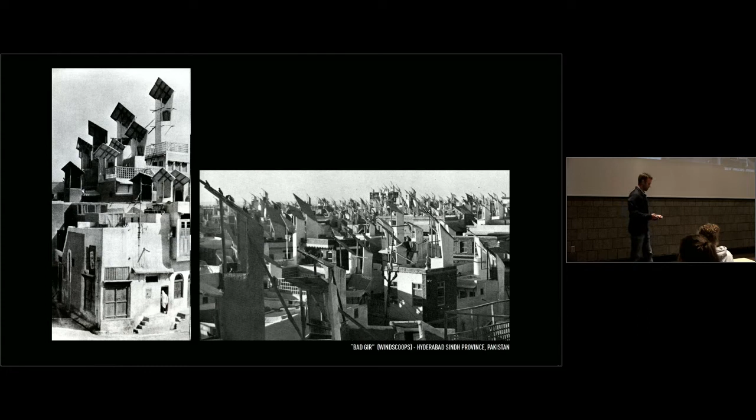So a modern version of architect - we can all have heroes. My latest hero, who I was talking to some of you about today, is Hiroshi Sambuichi, a Japanese architect doing incredibly responsive buildings.

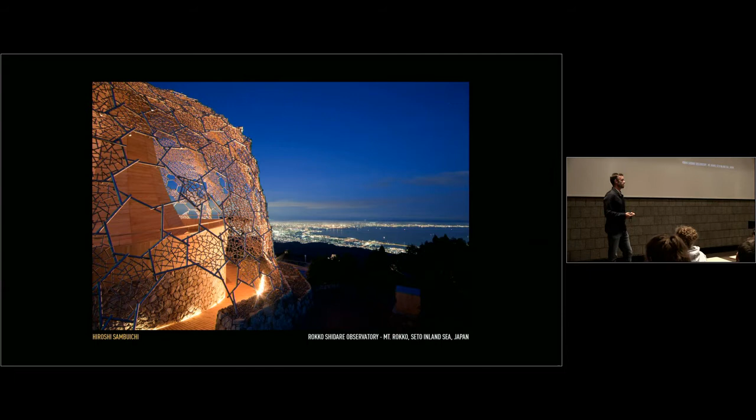This is an observatory at Mount Rokko. He works in the Seto Inland Sea, and this observatory's brief was to have an overview to understand the landscape and its connection to the city - that's Osaka in the background. What he does is spend two years, in two cycles, understanding the winds, the sun, the rain, before he ever designs anything. He understood here at Mount Rokko how the winds go.

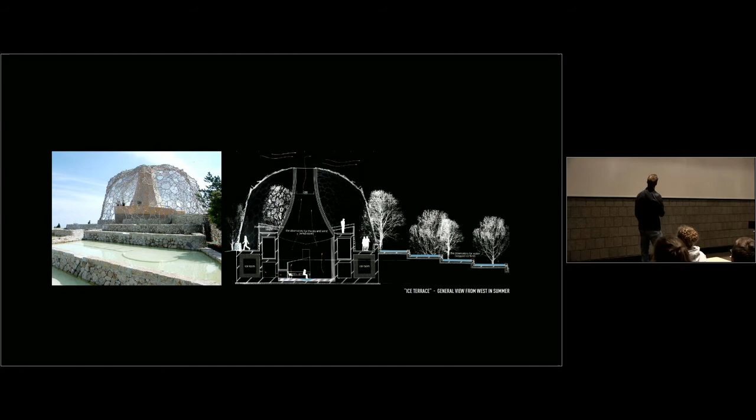Through this long observation, he designed a series of ice terraces - pools that cool the visitor in the summer, and then in the winter they harden and freeze. The actual frame around it is made from wood and stainless steel. Going through those two years, he realized there was a special frost that would occur on all the branches, but only a certain size branch, and only where the prevailing winds were. So he studied and found an exact diameter, and designed this frame around it to pick up this ice, this mist, and block the wind in the winter. Then when it starts to melt, it melts into these pools and then freezes.

From there, they cut out these chunks of ice and place them underneath the building in what he calls an ice shed underneath. But the magic of it is that when it starts to cool, it goes through these chambers and up and out through what's called a wind room. Well, I don't know if you can see - can you maybe dim the lights a little bit for these slides?

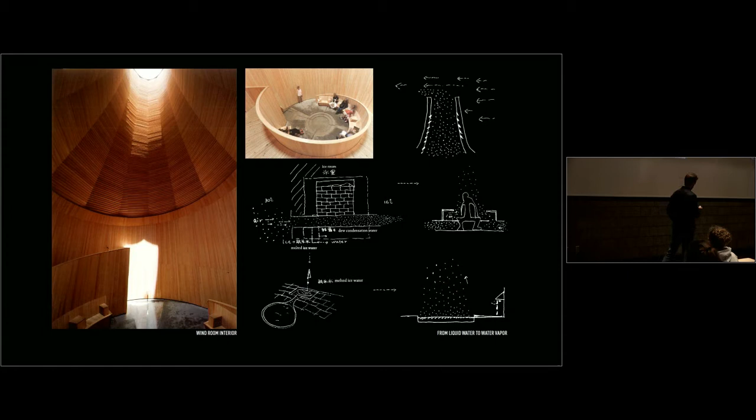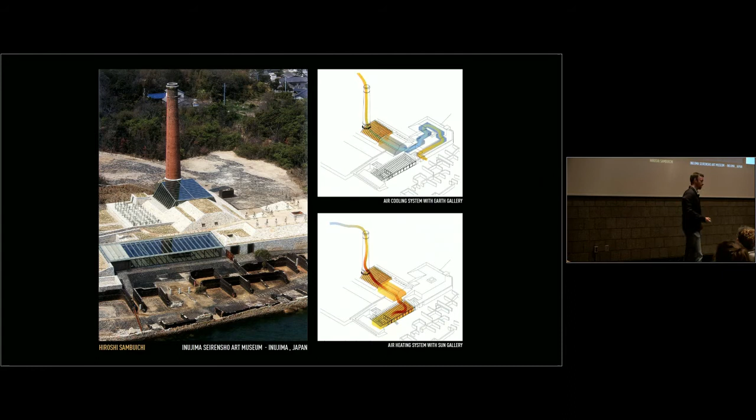What happens is there are vents on each side, and you sit. You can see this person with their arms up, and it ventilates your armpits. So that cool air comes in during the summer, and it's specific to place. I just wanted to show some of his other stuff, not so much talk about it. But if you ever have a chance to visit Japan, you have to see this. He doesn't have a website, but he has two monographs.

The last one before I start talking about my work with Lake Flato is Glenn Murcutt. Glenn had a big impact on me. I started to understand principles of architecture that were responsive. I started understanding the land because of him, and this is a very early one of his works—you may all know it, the Magney House. The Magney House was designed around a principle, and this is off the grid completely.

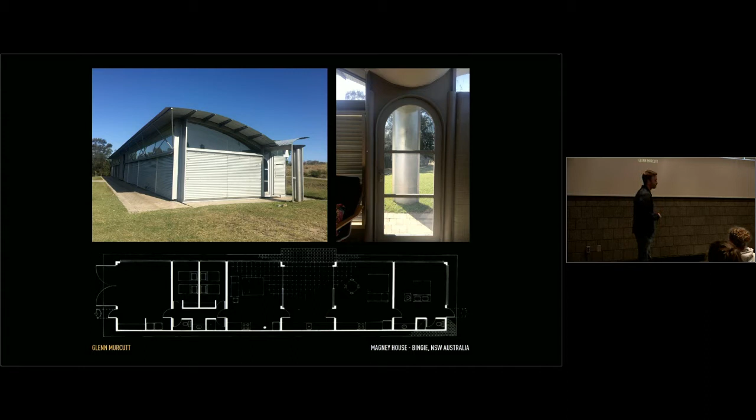There's a cistern underneath; it's all about capturing water. The showers—when you're here taking a shower, they ask you to take 60 seconds—so you understand water's placement. At the end of this corridor are the downspouts. So this is the view you get from inside, and you understand when you look out from it the importance of water.

The incredible thing about this detail—this is an early one—is he was always being told that he's oversizing his gutters, oversizing his downspouts. But the detail he has for this is beautiful. What he started doing after this project, instead of having water come to the center, is recognize that water doesn't want to move in 90-degree angles, and if you look at downspouts, they're all 90-degree angles.

What he did was search the landscape for the largest leaf, which happened to be a eucalyptus leaf. He oversized the gutter by 1.5 times, and then offset the downspout so that when it funnels in, it dislodges any branches. So the very design of the downspout responds to the land.

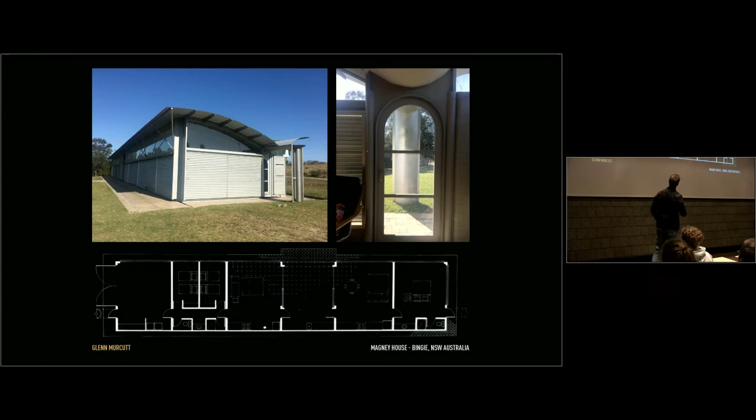So this is me on site trying to put this detail in motion with the downspout.

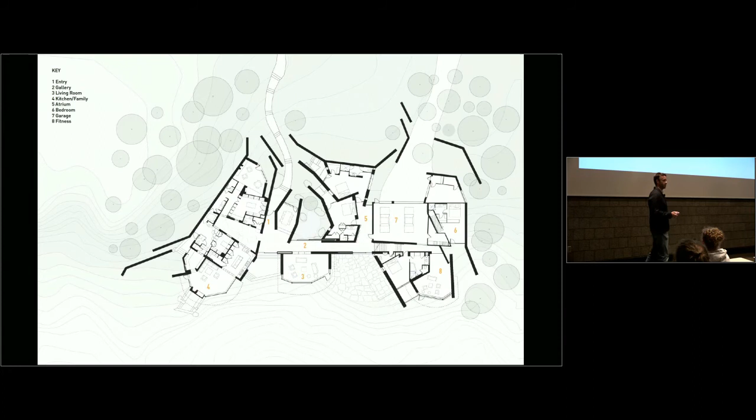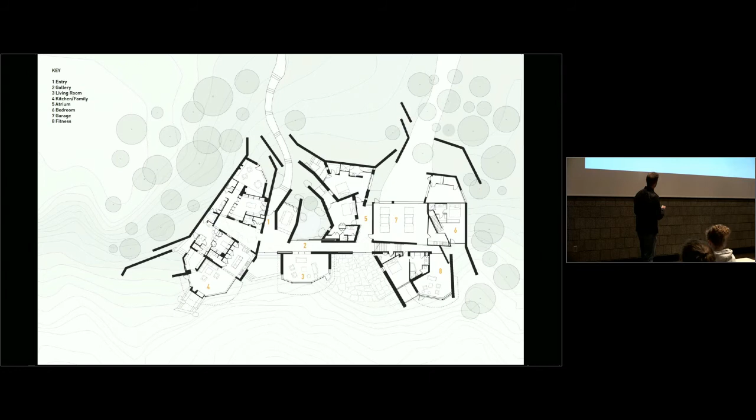The boulders, the rocks, the cliffs—all the walls are around that. They're nestled into areas that are flat. Spaces within are created to frame this, so you understand why the walls have moved, why the walls are what they are.

Again, you see the far view as you enter, but the near view is just as important. That's one thing I'd like to tell everybody as a student: the near view is as important as the far.

Water—I work a lot with water in the eco-conservation studio. It's really important to me. I live in my neighborhood, River Road, right along the river. It's the only untouched portion of the San Antonio River, and I walk through it every day. What's really important in starting to understand landscapes is what areas to preserve, what areas to enhance, and what to transform.

This is a project, the Marine Education Center at the Gulf Coast Research Laboratory, which we interviewed for in 2011—six years after Katrina wiped out the original building. The original building was right here; it was actually an aquarium given to the university. It had no trees on site, was 4 feet above sea level, and did not respond to the landscape.

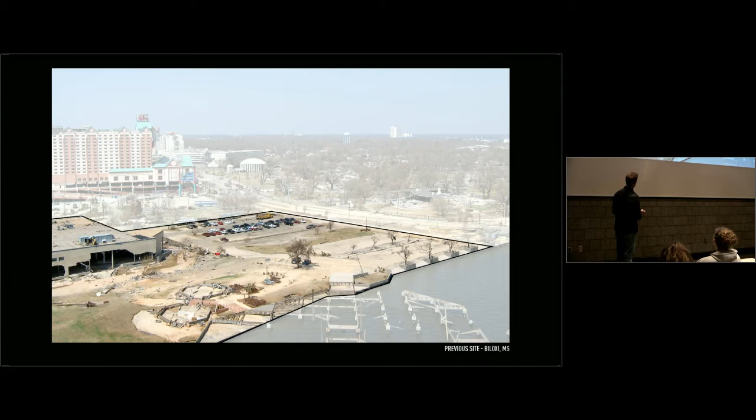The new site is a bit of an anomaly along the Gulf Coast—it's 19 feet above sea level. This is what the site looked like after Katrina was through with it. This is the building here; you can see the remnants of what's left and how close it is to the water.

This is the old building. And this is what happened with Katrina.

So resilient design, understanding that there are things you can do with the landscape to help you design. And this, actually a lot of this debris is not from the building.

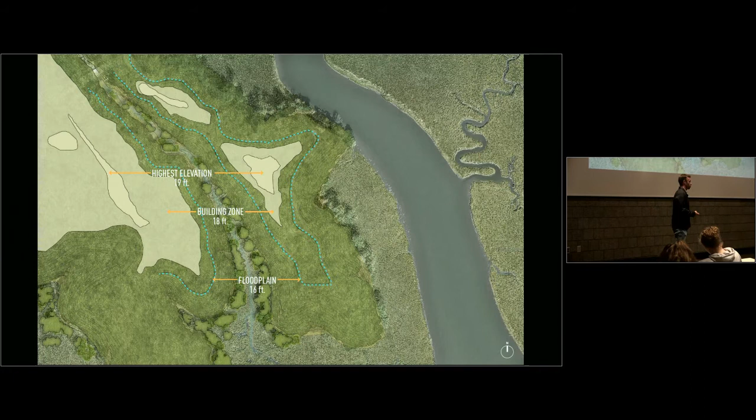Then what we did is we talked to Larry. He told us about when we do take trees out. What we did is we looked at trees that were non-native. We looked at trees that were at the end of their life cycle that would come down in a hurricane.

And we started flagging those trees. When we flag those trees, you see what happens in Mississippi when they put a new building in the landscape, because they're so worried about the trees falling on the building, they'll cut a 200-foot wide swath and they'll place the building right in the middle so a tree won't fall. Well, what happens when they do that is they just destroyed their wind buffer.

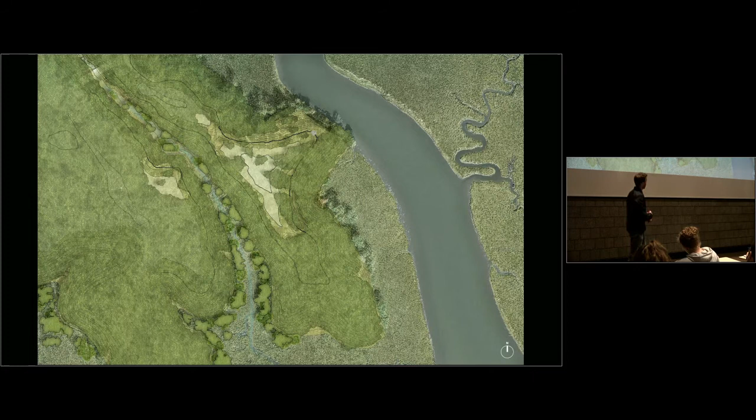So in creating an architecture of response, you should have the landscape work with you, work with the building. So with understanding these were the weakest trees, it then created openings there in the landscape where we placed our buildings. And the buildings, we were able to place the buildings so close

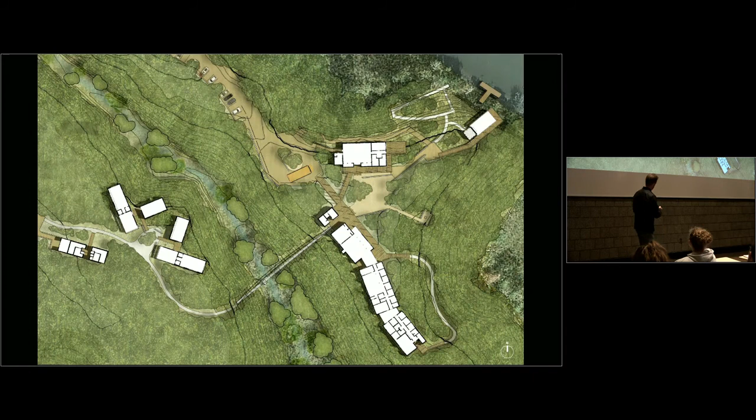to the trees that this is how it looked when it opened.

Again, creating architecture that responds to the landscape, having the trees buffer the buildings, understanding where to build. This is a 200-foot-long cable suspension bridge with one vertical support, so there wouldn't be any structure within the bayhead.

To understand it a little bit better, here's a cross-section. You enter in this building here. These are exhibit space, offices. Here's a multi-purpose space. This is an observation platform, observing the bayou.

200-foot-long cable suspension bridge to the other side with classrooms and labs on the other side.

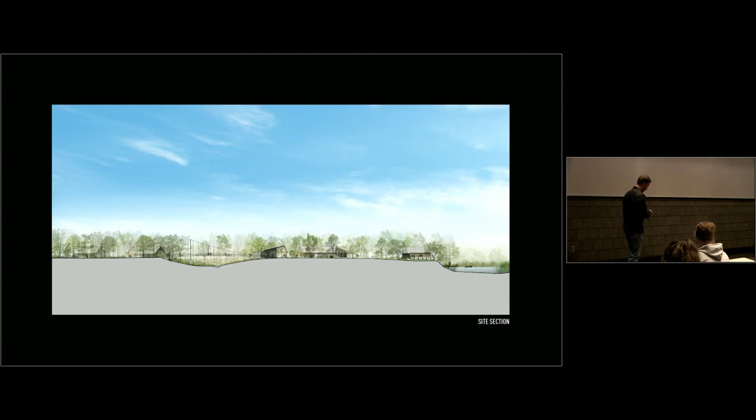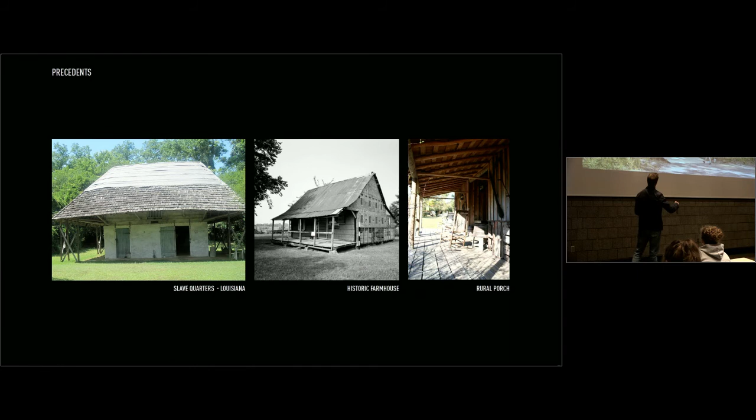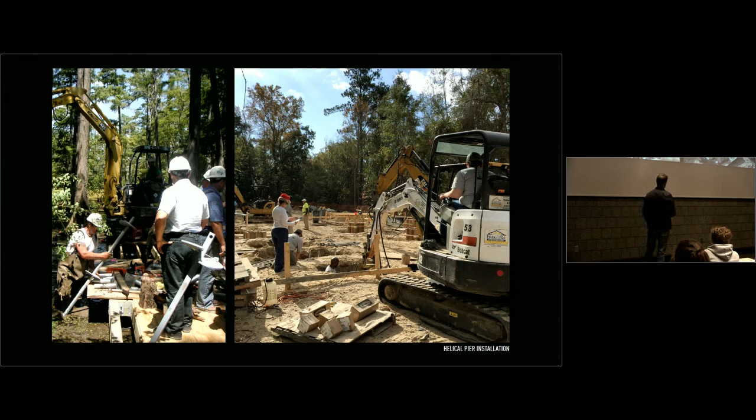Understanding how to build and respond to the landscape, you have to understand what has the least impact on the landscape. So here we used helical piers, because they are very precise in where they're located, so we could miss tree roots. It also lifted the building up so that water could flow underneath into that forested bayhead.

During construction, a hurricane went through, Hurricane Nate. It was a Category 1 storm. I was on site the next day, and there was one tree that fell. It fell off-site, and it came within a foot of the contractor's trailer, maybe telling them to speed up a little bit.

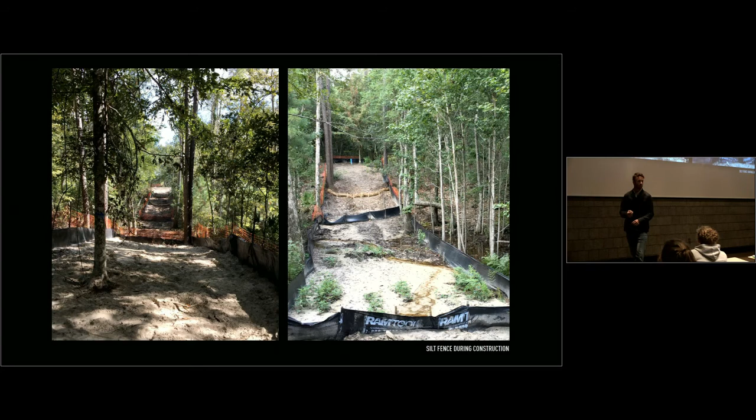But the last thing I want to talk about resiliency in this project is that a lot of people have a before and after thought on resiliency. They don't think about it during construction. Construction is when the landscape is most sensitive. So what I really want to implore everyone, when they go out and practice, is thinking about how you can be sustainable and resilient during the building process.

This is an example of what we did not do right. This is where the suspension bridge was. When they came and took down the trees, they removed the area in the bayhead where the bridge was to go. The bridge wasn't built for a year and a half. It created basically a dumping ground for silt. One silt fence was not enough. If we could have phased this to remove the trees directly prior to when the bridge went up, it would have saved portions of the landscape.

Second project on the water I wanted to talk to you about is Confluence Park.

I have a story about Ted Flato going to an East Coast design firm who will remain unnamed. They showed him the model shop and said, 'Oh, this is a great model shop.' They asked Ted, 'Do you have a model shop, Ted?' Ted said no. 'Do you have a 3D printer, Ted?' Ted said, 'No, we don't have a 3D printer.' The guy looked perplexed and asked, 'Well, how do you get your shapes?' And Ted's response was, 'We don't do shapes until this one. This is our first shape.'

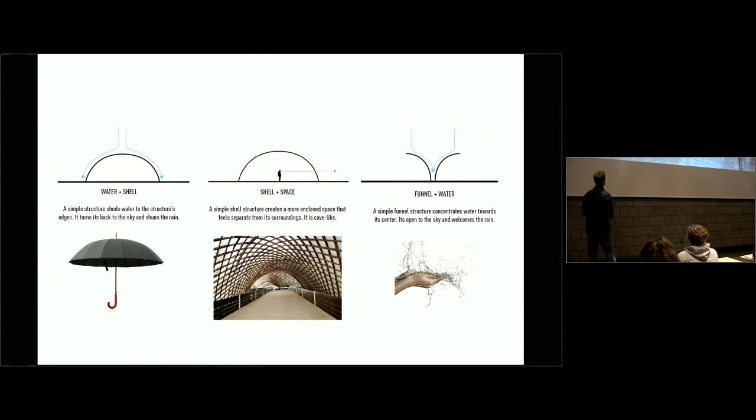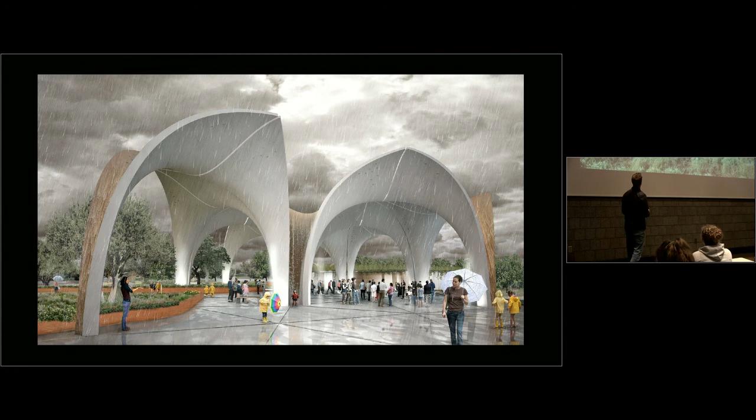The main inspiration for this pavilion was a petal, a tulip petal, how it captures the water and comes in, and then pulled apart.

I have to say, we worked with an incredible structural engineer, Chuck Naeve, out of Architectural Engineers Collaborative, who made this possible.

So how do you build something like this? This was a project commissioned by a firm that first came up with something different, but then couldn't figure out how to build it. We were really worried about that same thing. So we found a boat builder in Oakland that Andrew knew, who worked with fiberglass and built these fiberglass molds in Oakland with a 3D printer.

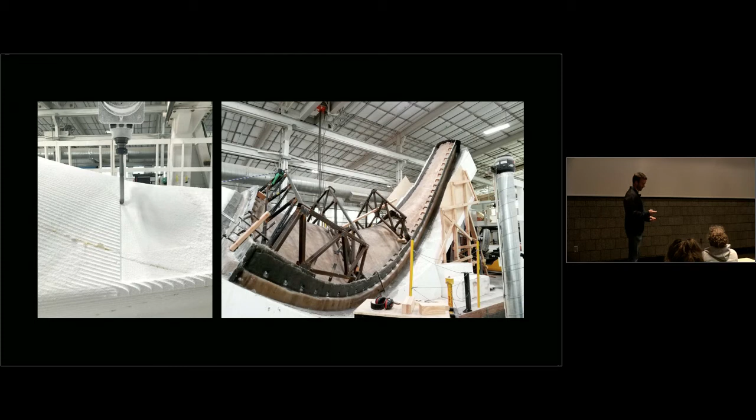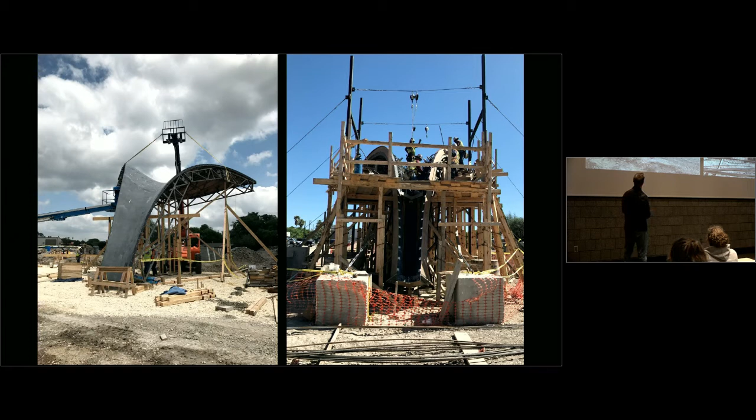These were shipped to San Antonio, Texas, and placed on site. There were 3 different petal sizes, and each one had a series of catwalks connecting to the other. It looked like a roller coaster.

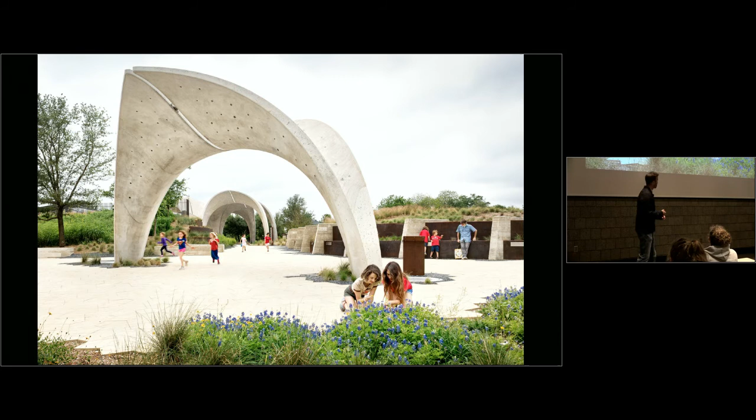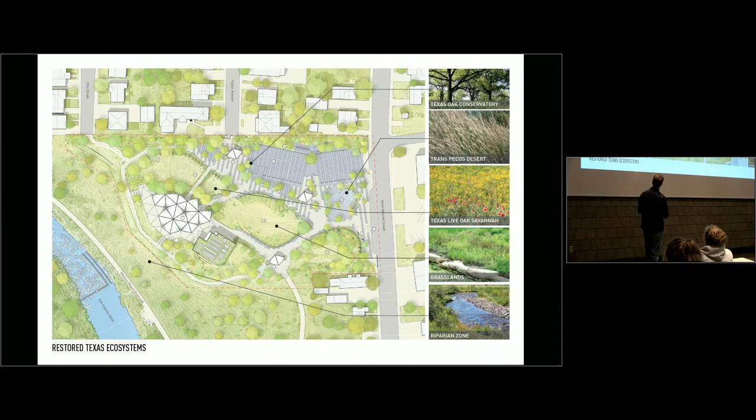Since this is a building to celebrate water and educate on water conservation, these were the landscapes we were preserving and enhancing along the San Antonio River. This was once a drainage ditch. And this is what it looks like today, with the education building in the background.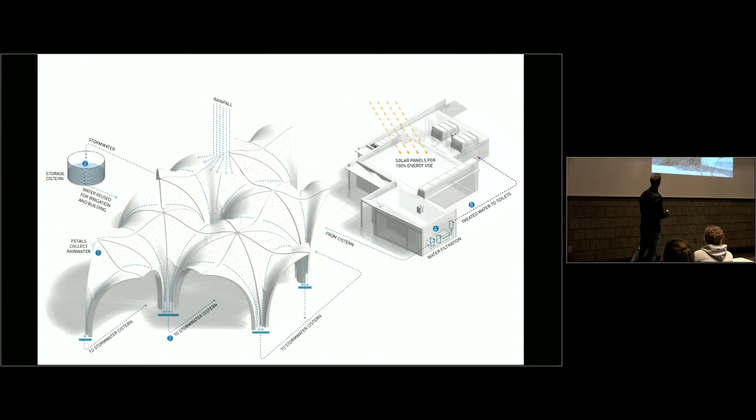Solar panels on top of the education building. And this is a space where children hang out, where it's collected.

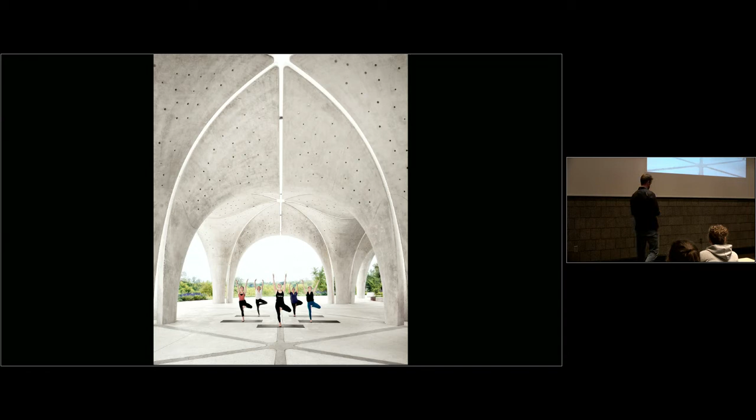So I wanted to end with a project that we have on the boards. This project is in Nebraska. It's the Rowe Sanctuary, a bird sanctuary for viewing sandhill cranes.

So in Gibbon, Nebraska, once a year, sandhill cranes and whooping cranes fly in from all over and roost in the middle of the Platte River. The reason they go to the Platte River is because it's so shallow and wide, an inch deep and, they say, a mile wide. There, they circle and land at night, landing in the center, and then slowly work themselves out. Well, the reason why they're there is actually a bad thing.

The reason they're all congregated: they used to spread along the entire stretch, but with humans coming in and planting trees along the riverbanks, they no longer feel safe along the river. There's a one or two mile stretch of the river where the trees are removed to recreate that sense of openness that was once there, and that's where they gather.

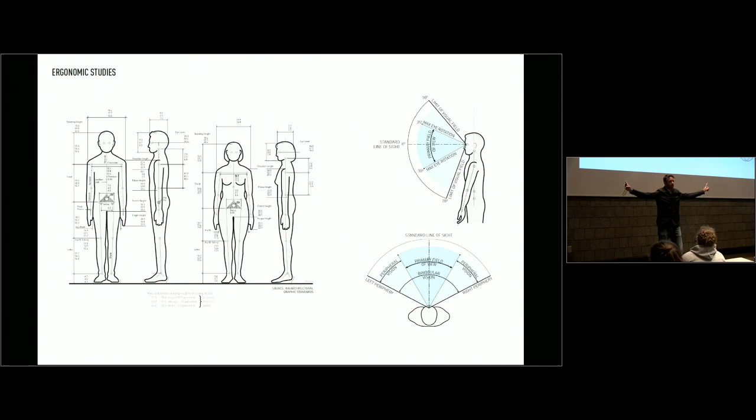So what we did is start to understand humans' field of view. It's the old test: you put your fingers out, and when can you start to see your finger? Here. When can you start to see your finger? There. And that created the view angles.

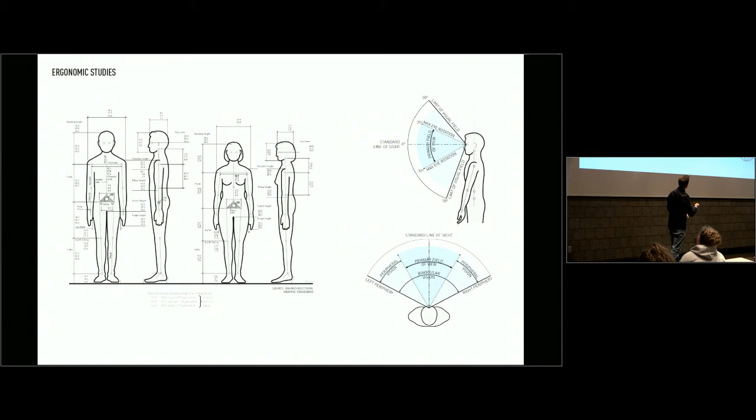Those view angles were placed on the facade of the bird structures so that 97.5% of all humans can see it, from the shortest to the tallest, understanding where that falls.

Understanding again that these are placed not on the river, but slightly back because of how much the river moves, making sure that you saw every crane. But also, you were in these blinds for 3 hours. It's March, it's cold, there are jackets everywhere, people tripping over everything.

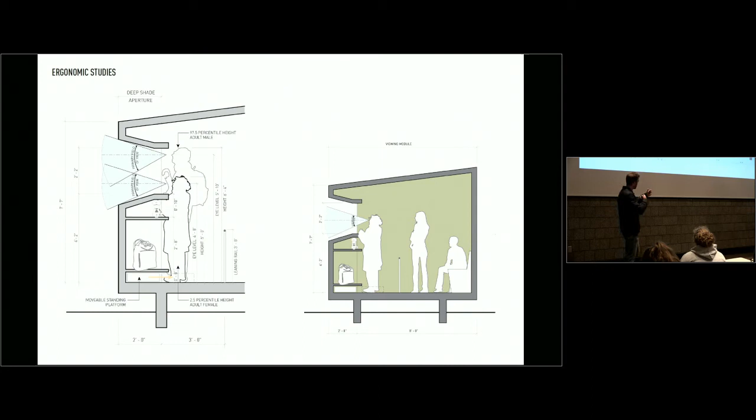So we wanted to create a space that did that, but also pull you back from the facade so that when cameras or binoculars were used, it didn't spook the cranes itself. So creating that interstitial space, very, very important.

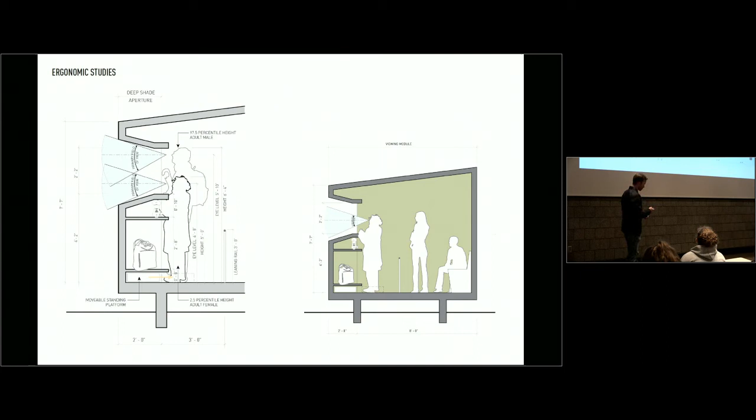Then we understand grouping the people together, standing shoulder to shoulder, again understanding the ergonomics, what felt comfortable.

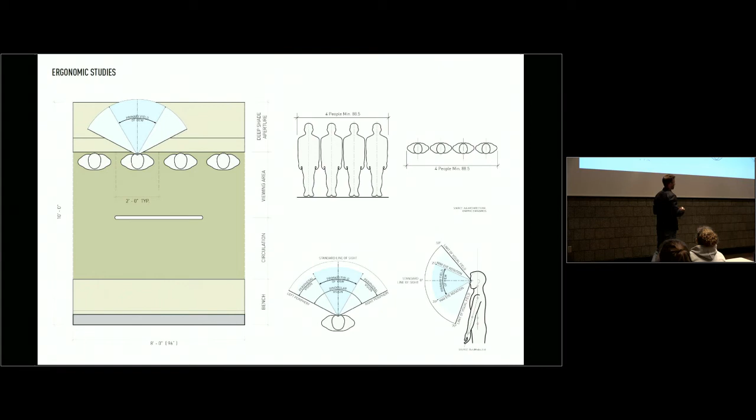The other part of this project was that for 6 weeks the sandhill cranes are there, but for 46 other weeks they're not there. So how can you create architecture that's flexible when they're not there? They asked us to not create a bird blind, but to create a discovery station. So how this is used when the cranes were not there was just as important.

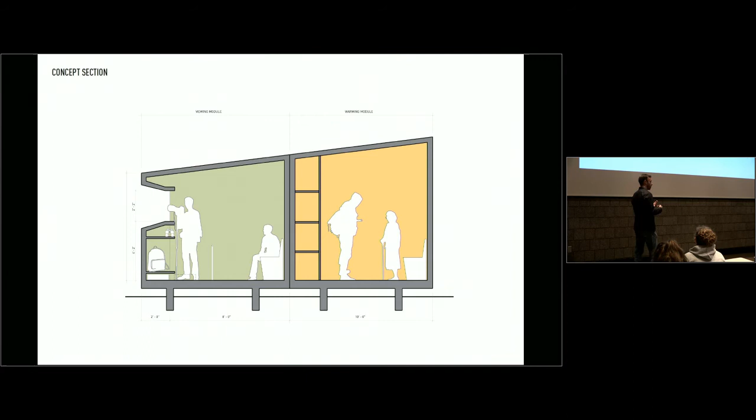This is one space in the back with warming huts, knowing that people couldn't leave for 3 hours. Is there shelter within the blind for those who were getting cold? So this was the plan, a simple building.

How corners are addressed. Seating areas - what we noticed when we were there is it's hard for people to stand for 3 hours. People sit in back, and when they sit in back, they're staring at someone's back. How can you give the person an experience of viewing the birds and cranes when they're in the seated position? So what we did is we looked at precedents like this.

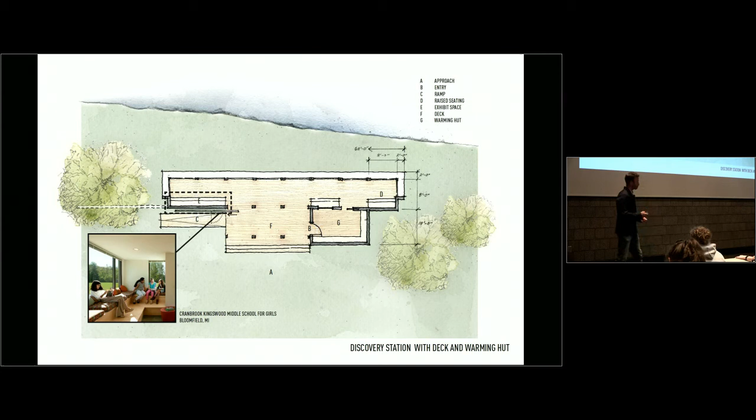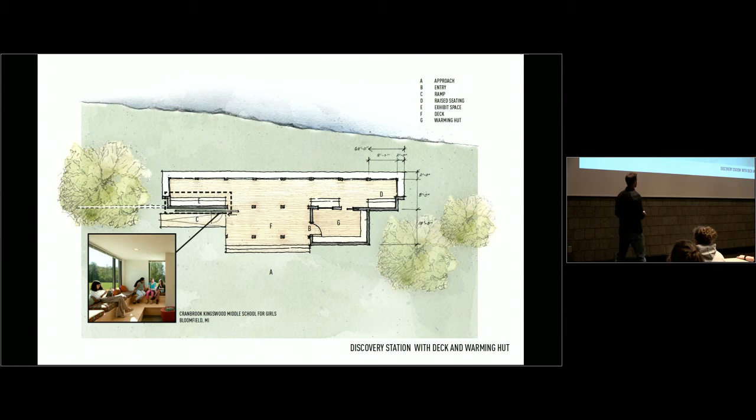This is our Cranbrook Middle School for Girls, close to here. You can see that you step up and you're elevated when you sit. So we designed this into the back portion so that when you rested, you were looking over somebody and had that same view. And this is a concept rendering.

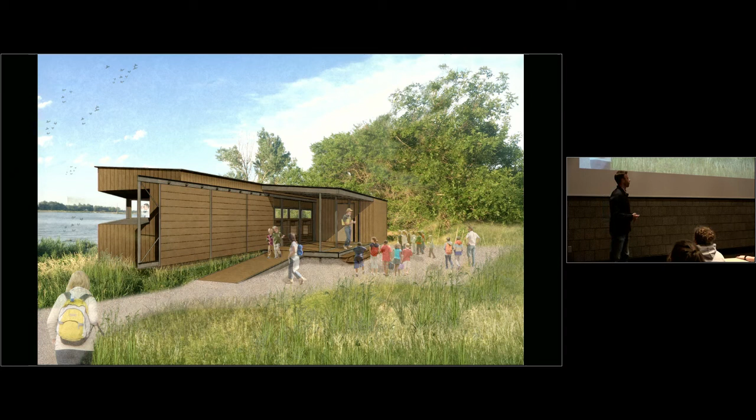It's under construction now, and for those that want to see this next year in March, there'll be 4 built. Thank you.